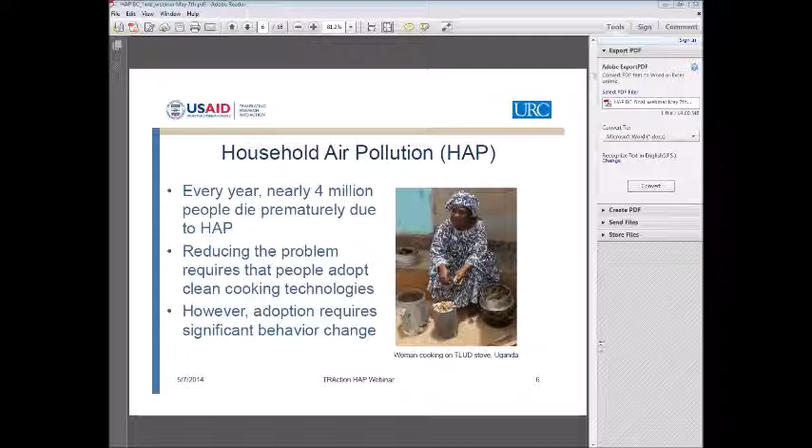TRAction supports research across many different countries through Latin America, Asia, and Africa, with a very large focus on Africa, as you can see from this list. Next slide. Our research focuses on many different topics in the areas of disease control, nutrition, environment, health service delivery, and access to care. And today we're going to be focusing on our household air pollution work. Next slide. Household air pollution is a serious threat to health, responsible for nearly 4 million premature deaths every year. Technologies are available that can significantly reduce the problem, but adoption and use of these technologies has been low, which is partly due to significant behavior changes that are required to adopt these technologies. Next slide, please.

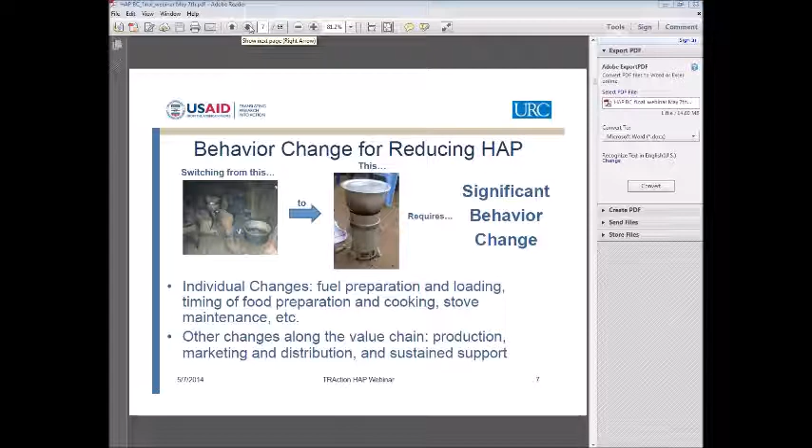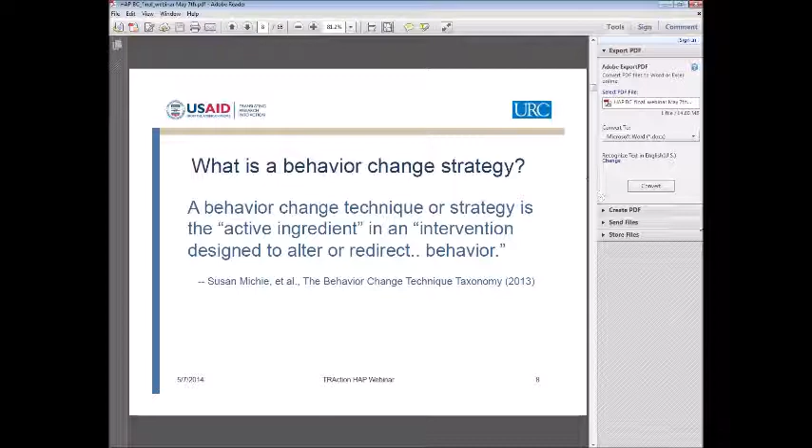Switching from an open fire to an improved cook stove requires that individual users change their cooking behaviors, such as the way they prepare and load their fuel, the time that they devote to preparing and cooking, and also cleaning and caring for their device. But beyond the individual, other activities along the value chain must also be changed to create an enabling environment for cook stove adoption. And this can range from setting up systems to produce and manufacture stoves, marketing and dissemination, and building infrastructure for repairing and replacing stoves. Next slide. To address these challenges, it's important that behavior change techniques are incorporated into any cook stove program. And for the purposes of our presentation today, we're defining behavior change techniques or strategies as the active ingredients in an intervention that are designed to alter or redirect behavior. Next slide, please.

In an effort to increase the evidence on behavior change techniques for household air pollution reduction, TRAction funded 3 research teams to develop and test behavior change strategies that can increase the adoption of improved cook stoves. So today we'll hear lessons from each of these 3 teams on which strategies worked and which didn't. We'll hear from PATH and Impact Carbon discussing lessons from their work in Uganda, and also from Duke discussing lessons from their work in India. Next slide. First, we'll hear from Alan Namagembe of PATH, then from Theresa Beltramo of Impact Carbon, and finally from Marc Jeuland of Duke University. And then to wrap up, Kirsty, a consultant working with TRAction on our household air pollution portfolio, will summarize the cross-cutting lessons across all 3 of the projects. Next slide.

So with that, I'll turn the floor over to Alan. Is Alan with us? So I think Alan has been having some difficulties joining the webinar. She's joining from Uganda. So we also have Nancy Muller on the line, who also worked on the PATH research, who will be able to present this portion. Hi, this is Nancy Muller. I'm presenting on behalf of Alan Namagembe, who, as Kendra said, has had a hard time connecting. But she will be with us in spirit and put a great amount of effort into this project. Next slide, please.

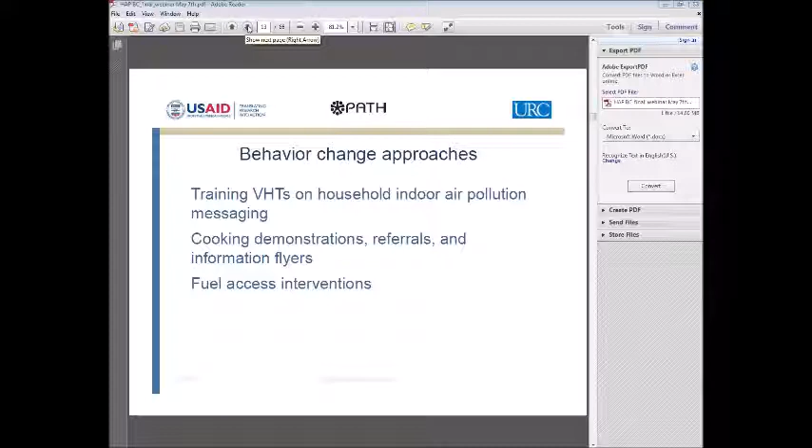These were strengthening the salespeople who were able to provide already processed wood for the TLUD stoves, and also providing bow saws to the community on a shared basis, and then they paid us back. Next slide, please.

So we wanted to just jump into what worked on a high level. What we saw was that the community cooking demonstrations were incredibly effective. They really allowed the community to get excited about this stove, which initially took some work because it would take a while to get it going. But once it got going, people were very, very interested and excited to see how quickly it cooked, how little smoke was produced, and the fact that it produced charcoal at the end. So they could experience these benefits firsthand, and that was a very effective behavior change approach.

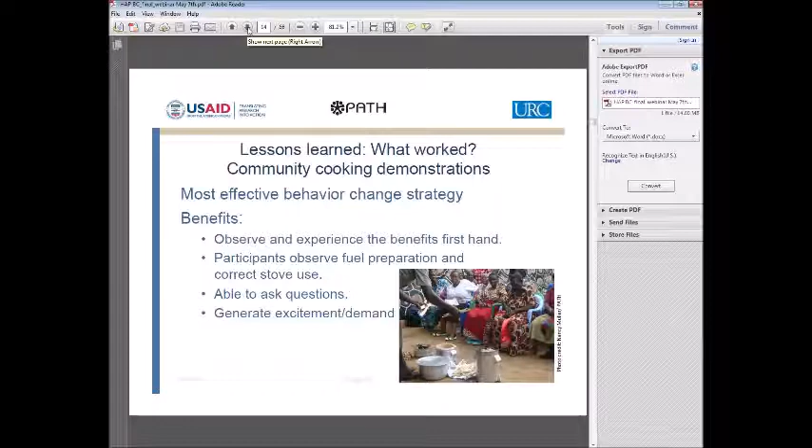They also were able to see the different steps of fuel preparation and loading and lighting, and they were able to ask questions of the community cooking demonstration representatives. Next slide, please.

What else worked? Increasing access to the processed fuel. That we realized was the critical element, that even though some people were willing to buy the stove at varying prices, the fact that fuel was so challenging to prepare made it really a disincentive to people to use the stove, even if they had bought it. So once we introduced these 2 fuel processing interventions, we found that there was a 42% relative increase in the use of the stove in the people that had access to these interventions.

Having the village health team members be information sources in the community was an effective approach. They were able to help raise awareness and engage the community in the importance of addressing indoor air pollution and the various benefits of improved cook stoves. And they could also provide information on where to get the stoves and correct practices. Next slide, please.

So the challenges, the things that really did not work well, were the cost of the stove and, as I mentioned, the fuel access. Overall, the TLUD was used for only a total of 7% of the recorded use events based on the SUMS monitoring. And the barriers to use were the cost, both in money and time, of using the stove, and really the lack of access to the processed firewood.

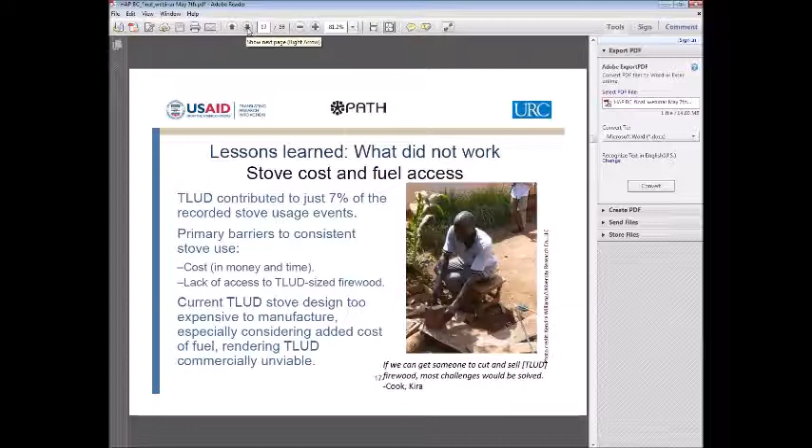The design, we found in doing a commercial viability assessment, was really too expensive to manufacture locally and sell the way that we were doing, especially when you look at this added cost of the fuel. And it really made the stove not commercially viable in the way that we were working with it. And we even looked at the potential for microfinance and found that that still would not have made the stove viable. Next slide, please. And the stove really was not fully compatible with the cooking practices of the communities we were working in.

There was stove stacking. Everybody had multiple stoves, and every stove was used for a different purpose. So the TLUD was effective at things like cooking quickly, but it was too expensive to just boil water quickly. So they had to think ahead about what they were going to cook on it. A highly motivated user definitely could use it. There were several households that used it more than once a day, but out of the total user population, it was not significant. And there was definitely mixed feedback on its ability to cook the staple foods that they eat in Uganda.

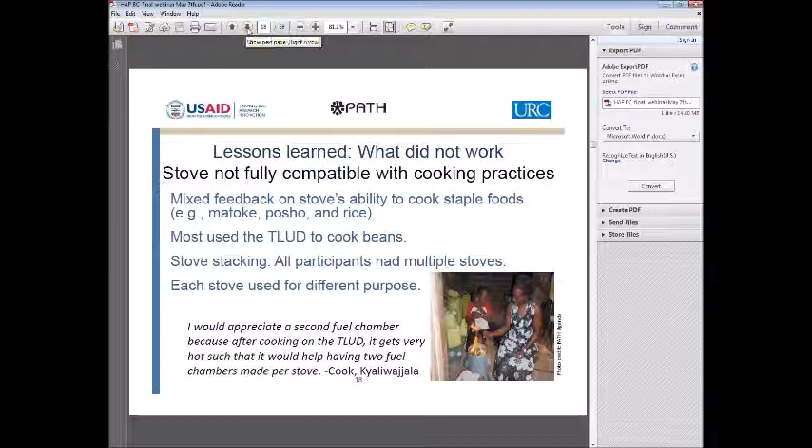So what we would recommend is integrating cooking demonstrations in the communities into any cook stove intervention as a way to engage the community and help them to understand the benefits and the use steps of these stoves. Also to consider absolutely the fuel when selling a cook stove and finding ways to pair the access of the fuel with the stove.

Training community health workers, I think we were surprised that that seemed to be an effective way of engaging the community, because they were really trusted voices in the community, they were present a lot and they were members of the community. We allowed many of them to buy a stove at a subsidized price initially, and that was definitely helpful because they could speak from experience. And then mapping out the true costs of manufacturing new and improved stove designs so that you can maximize the uptake.

Next slide, please. Next steps for us are that we are looking into innovative sales and marketing and distribution approaches for clean fuels like LPG. We're very concerned with the health effects of cook stoves, and we want to look at approaches that we feel could have the quickest route to affecting health, understanding that there will be many issues related to marketing and distribution and cost that need to be addressed. We're also looking at bundling improved cook stoves and fuels with other consumer goods and looking at ways of financing them. So the third approach would be to identify financing mechanisms that could make these products more affordable and more commercially viable.

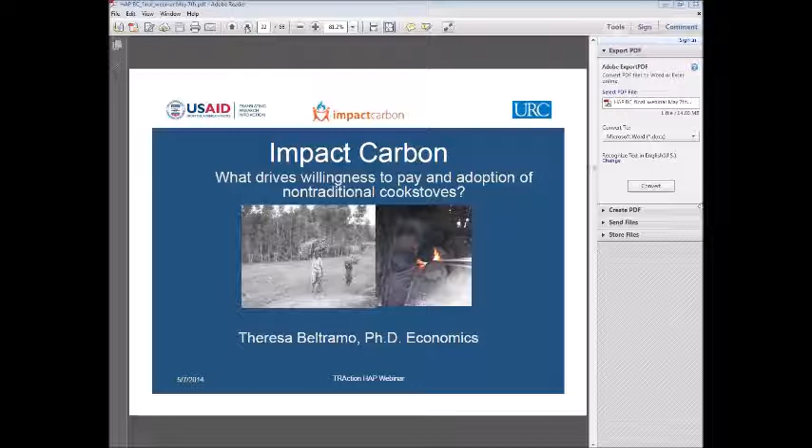So let me begin by saying that if we were to think about the biggest problems affecting our world today, any socially conscious person would have to include poverty, disease, and climate change. Traditional cook stoves cause all three of these simultaneously. Yet little hard evidence has been gathered about what actually motivates purchase of and willingness to pay for non-traditional cook stoves. Next.

Today I present results from our USAID TRAction funded research, which has been designed in collaboration with colleagues David Levine at Berkeley and Garrick Blalock at Cornell. The goal of this research is to test some solutions to hypothesized barriers to adoption of non-traditional cook stoves. In particular, today I will present on 2 of 4 randomized controlled trials funded by USAID. The first randomized controlled trial tests whether improved contracts can increase uptake of clean cook stoves. And the second tests what factors affect willingness to pay for clean cook stoves. Particularly, we test whether marketing messages that the cook stove saves time and money, and that the stove improves health, increase willingness to pay for non-traditional cook stoves. And this research takes place in rural western Uganda. Next.

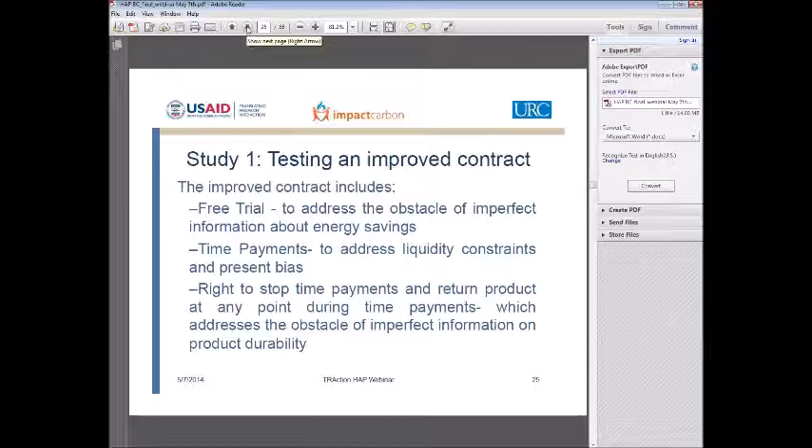So our study is designed as follows. We randomly selected 10 subsets of villages, which are called parishes in Uganda, so the groupings of villages, if you will, to receive what we call a pay within the week sales offer, and 14 parishes to receive the improved contract I just described to you.

For the pay within the week offer, we had an initial sales meeting, and we gave households a week to go home and gather funds before we had our second sales meeting. Our sample size is on average about 60 people per parish meeting, and we had 412 households attend our sales meeting in our pay within the week offer and 720 in our improved contract offer.

Then for both sales offers, we held marketing meetings to sell the stoves in each community. Our price was US $16, and we set this price based on our previous willingness to pay experiment, which I'll describe next. And at the sales meeting, people placed orders to purchase stoves. Next.

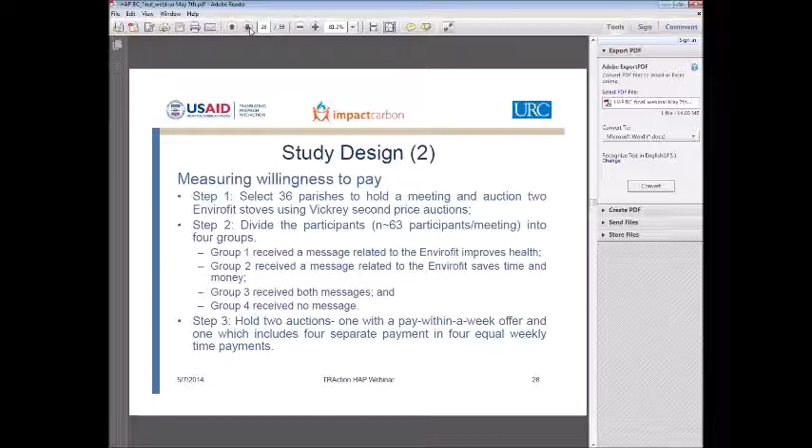Next. What do we find? We find that marketing messages do not affect willingness to pay. There's no effect for marketing messages on willingness to pay, whether it's health, or the stove saves time and money. Time payments, though, do raise willingness to pay for a non-traditional cook stove by 41%. Not surprisingly, wealth matters. Each additional asset owned increased willingness to pay by 10%.

And when we test for the role of a stable income, we find that having a stable income increases willingness to pay by 8 to 10% for both men and women participants. But there's no effect of having a stable income on willingness to pay for married women. We find large gender differences. On average, men are willing to pay 21 to 23% more than women for the cook stove. Next.

The success of the improved contract suggests liquidity constraints, present bias, concerns about savings and durability are all important barriers to address in cook stove programs. Over 90% of our participants who accepted a free trial successfully completed time payments in both studies. So we feel that this research shows that you can roll out improved contracts, and they do work. Some strategies to help keep costs of payment collection low include employing focal point people, as we did, to collect the funds, and or, where appropriate, using mobile payments. Next.

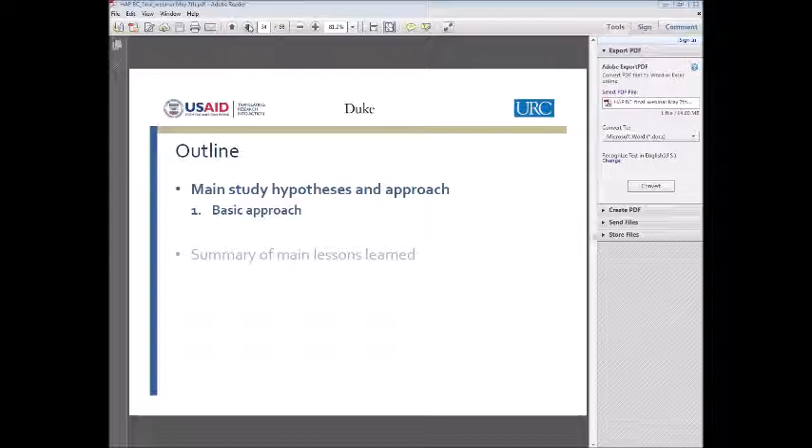So I'll begin with discussing the main study hypotheses and features, and then talk about the main lessons learned from the research. Next. Our basic approach was very much motivated by this problem of not knowing much about what can be done to stimulate adoption of improved stoves. Next slide. So we took a pretty deliberate approach as we were designing our experimental study. And this began with a literature review looking at prior evidence, both from the literature on improved cook stoves, but more generally on other environmental health improving technologies.

Next. And then we went to the field and collected detailed baseline data on about 2,000 households in 2 different locations in India, which I'll talk about in a minute, to better understand baseline cooking practices, knowledge and perceptions of improved stoves as well as traditional stoves, and learning about stove design preferences through some stated preference discrete choice experiments. Next. Using this baseline data, we developed a series of pilots where we tested different potential intervention features. And these intervention features came out of the lessons of these pilots.

So the pilot experiments taught us a number of important things. First, that knowledge of improved cook stoves, at least in terms of their benefits, was quite limited. The second big lesson from these pilots was that stove choice appears to matter and that not all households favor the same technology. The third thing that we learned was that many of these rural and poor households are heavily liquidity constrained, and so paying for stoves in one single upfront payment was something that very few households would consider seriously. And then finally, building on the liquidity constraint point, we also found that demand for improved cook stoves was fairly limited.

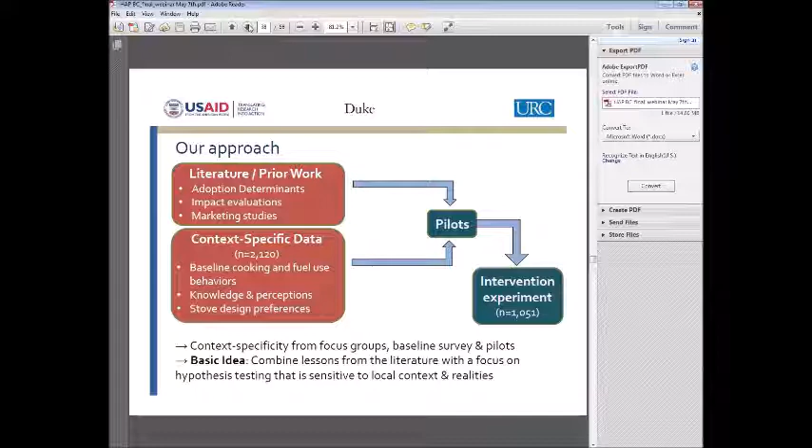Next. So with these lessons, we developed an intervention experiment to test for the effectiveness of specific features of the stove promotion program. Next slide.

And just to tell you a bit more about the context of our surveys, we collected the baseline data in the Gangetic Plains of Uttar Pradesh, highly densely populated zone, kind of a hotspot for traditional biomass burning in traditional stoves.

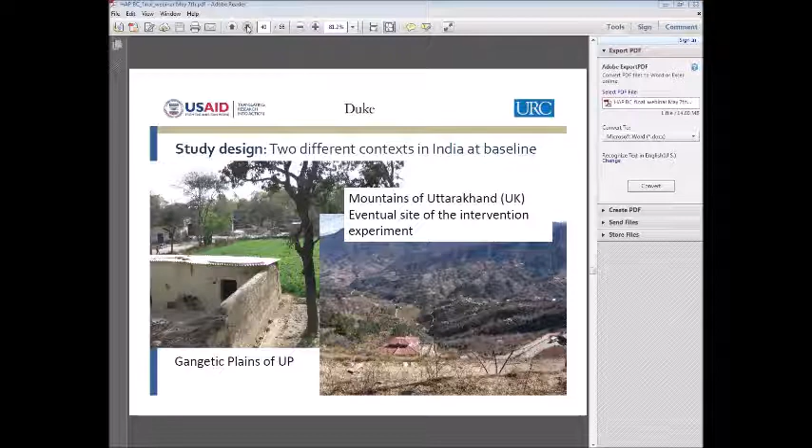Next. And we also collected baseline data in a very different context in the mountains of Uttarakhand, where there is also fairly high population pressure, but not nearly to the same extent. More fuel wood available to households, but also accessibility challenges.

Next slide. And within these two states, we deliberately stratified our sample into observationally similar communities. So each of these had two sets of communities, one of which was a set of communities where our partner NGOs had prior experience working and promoting various technologies, though not necessarily cook stoves,

and the other set of communities where they had not previously interacted, with the idea in mind that this institutional history and perhaps the relationship between institutions and households would make a difference in terms of the eventual success of a stove promotion program. Next.

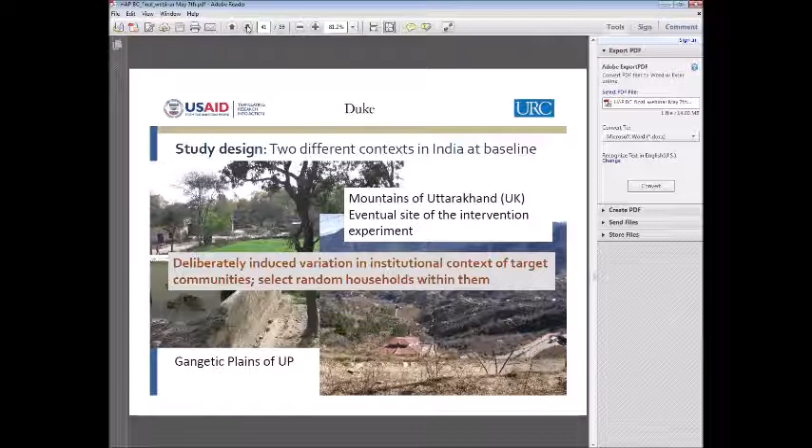Okay, so our main experimental hypotheses coming out of the pilots were that, one, intensive information and marketing would matter, and that this would only matter really if we designed a financing deal that would make sense for households, meaning that we could address their liquidity constraint. And then the second, in order to deal with potentially low demand for the stoves, that incentives, price incentives and subsidies would matter. Next slide.

So the features of our intervention experiment were first to provide information to all households on two different potentially improved stoves. One, a natural draft biomass burning stove, and the second, a very different technology, an electric coil stove that could be plugged into an electrical outlet.

And these information sheets compared the stoves in terms of a variety of different attributes, their costs, the fuel requirement, things like the maintenance that would be required, the amount of smoke emitted by the stoves, etc. So you can see a picture of the information sheet on the left side.

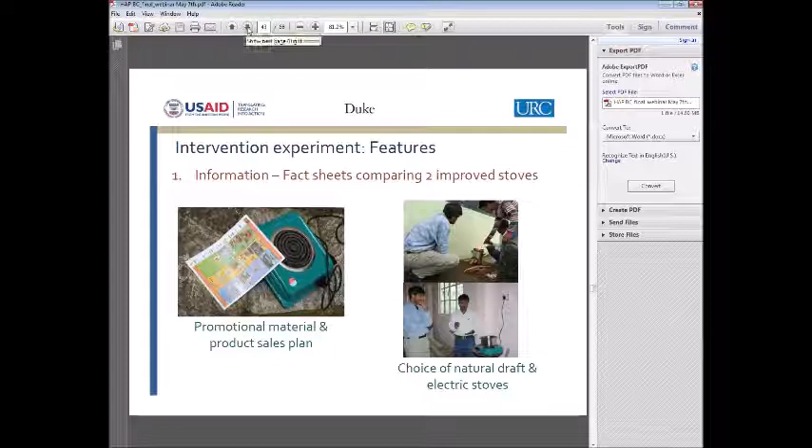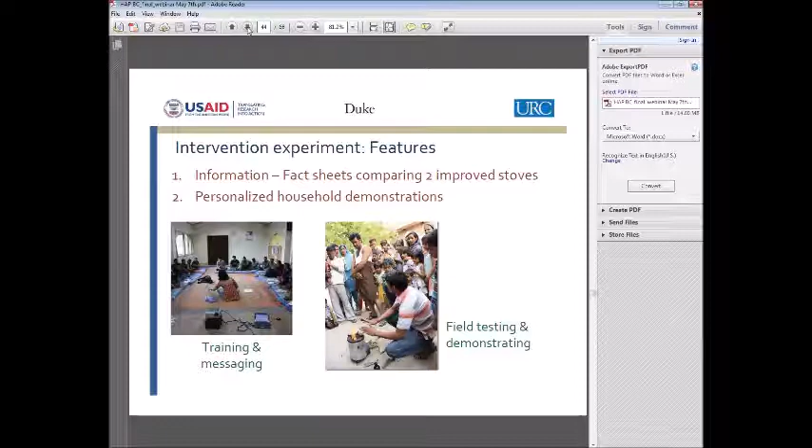Next. The second component of the intervention was to provide personalized household demonstrations of the stoves. So every household in our sample, and these households were randomly selected from the communities that we were working in, received a household demonstration from a trained team of salespeople. Next slide. Next slide.

And then the third feature was to allow households to make their payments in 3 even installments. This was to address the liquidity constraint that households might not be able to pay up front. The fourth feature being that we randomized these incentives to households, and the incentives were structured to be rebates that would be delivered to households at the time of the final installment payment.

So it was a delayed subsidy, with the motivation being that this might encourage the households to experiment with the stoves, because the rebate was conditional on them using the stove, as observed by our sales teams.

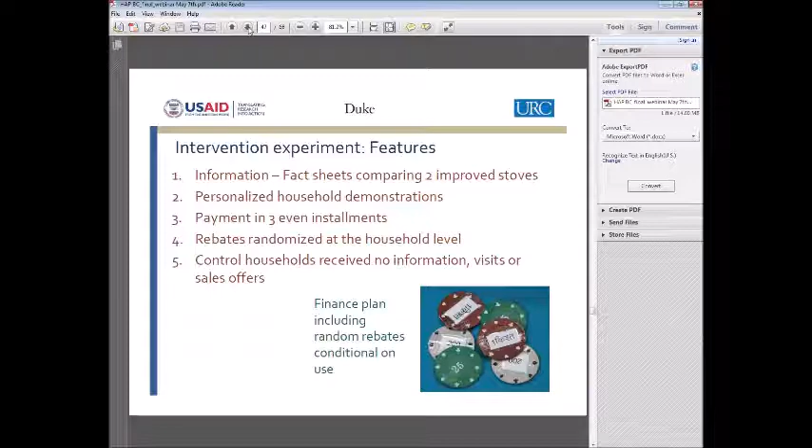Next. The control households, who were the comparison group, received no information, no sales visits, and no sales offer. So we can think of this as 2 large groups of households, control and treatment households. And within the treatment households, they had different levels of rebates that were randomized. Next slide. Okay, so to tell you about the main lessons from our study.

Next. The first major lesson is that it does appear possible to achieve high adoption in low-income settings. In our Uttarakhand sample, which is where we carried out the intervention, 57% of households were below the poverty line. In our treatment group, we see that ownership of improved stoves doubles from 30 to 60%.

You may be surprised at those high baseline levels of improved stove ownership, but these are primarily LPG stoves, which have penetrated to some extent in rural India. In the control group, we see no increase in improved stove ownership over the time of the study.

And essentially, this is evidence that with a full court press of information and promotion, and I'll show you results on the incentives, it is possible to achieve high adoption of improved cook stoves. Next slide.

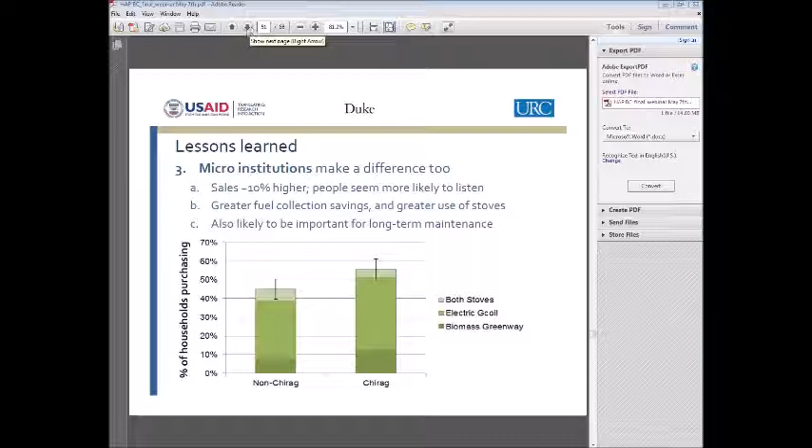It's very important, I think, when we think about designing these improved stove interventions to consider the role of technology choice and what households actually want. We observed great variation across households in our sample in terms of the various features that they placed the most weight on. In our pilot intervention experiences, we discovered that there was great enthusiasm for this completely different technology that we hadn't originally considered for our study, which was this electric stove.

And then finally in the experiment, we see that there was great enthusiasm again for that stove. Roughly 3/4 of the purchases are for the electric stove, and the other quarter of households select the other alternative, which is the natural draft stove. And it's important to note that these two stoves were roughly the same price. Next slide.

Finally, based on the experience from our pilots, we were able to design an intervention that achieved high adoption. But without really carefully testing these different features, and this involved products, as well as the demos and the sales pitches, and payment mechanisms, it's likely that we would have designed something that would not have been nearly as effective. So doing some small-scale experimentation prior to scaling up an adoption program is pretty critical. Next slide.

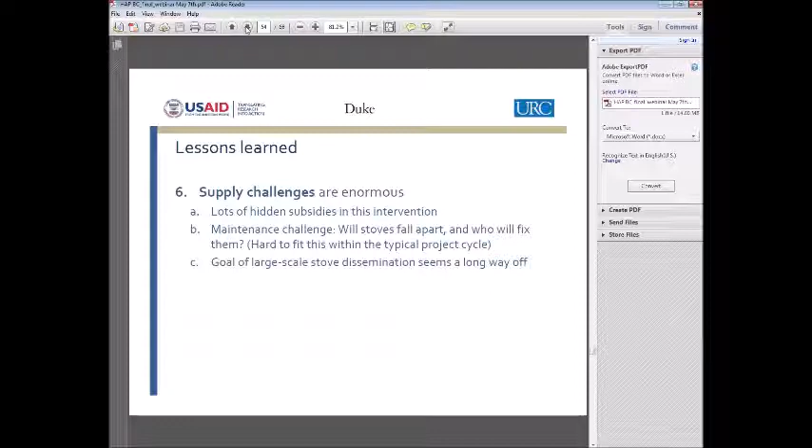Within our short-term study, we couldn't really investigate this question in great detail. But suffice to say that the goal of large-scale stove dissemination seems a long way off because of these supply challenges. And we think that the latent demand is there for many of these technologies, but getting the stoves to these sites is expensive and likely to drive up costs. Next slide. So here is a recap of our main lessons.

And just to tell you a little bit about next steps in our thinking in terms of this study, we remain in close contact with our stove promotion NGO partner in Uttarakhand, and we plan to study longer-term impacts in these communities since we only measured short-term impacts in our follow-up survey. And part of that will also be trying to calculate better the costs and benefits of these interventions and what are some of these hidden supply costs that we don't know too much about.

And then finally, perhaps doing some experimentation around maintenance and provision of maintenance to households that adopt these stoves in rural and remote locations. Thank you very much.

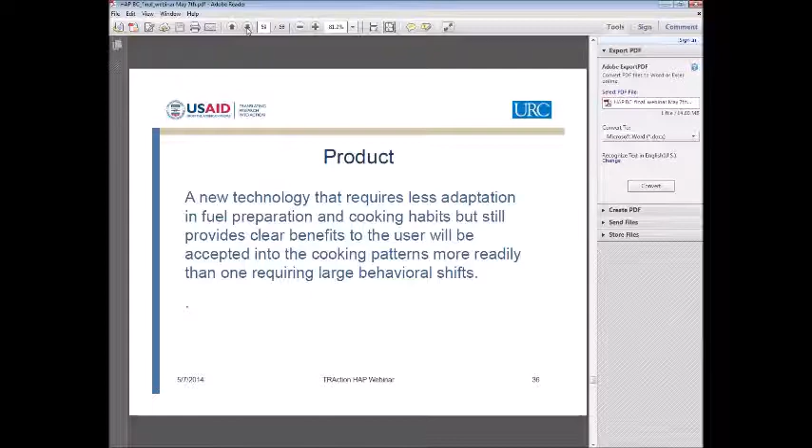2 of the projects showed that consideration needs to be given to the current and long-term mechanisms and channels for supply for the stoves, and if necessary, the required fuel at the beginning of the project. Mark just presented how the supply of the stoves was a great challenge and a potential barrier to scaling up the stove project. And Nancy also described how the use of the TLUD actually increased when processed fuel was made available. These results demonstrate key prerequisites to enable the targeted behavioral change. Next slide.

The projects also presented 2 effective mechanisms to stimulate demand for the new technologies in their target markets. They were to increase trust in the product and the people promoting and selling it, and once this has been achieved, to then effectively promote the product. Next slide.

So a low level of trust in the product and the promoters can inhibit demand. This, we find, is a particular challenge in situations where people from outside the community are promoting a relatively expensive, unproven new technology. The studies highlighted several mechanisms that worked to gain the community's trust and ultimately had a positive impact on stove uptake. The free trial model presented by Teresa reduces commitment to buy until the product has been tried and concerns such as those regarding durability and ability to function have been addressed.

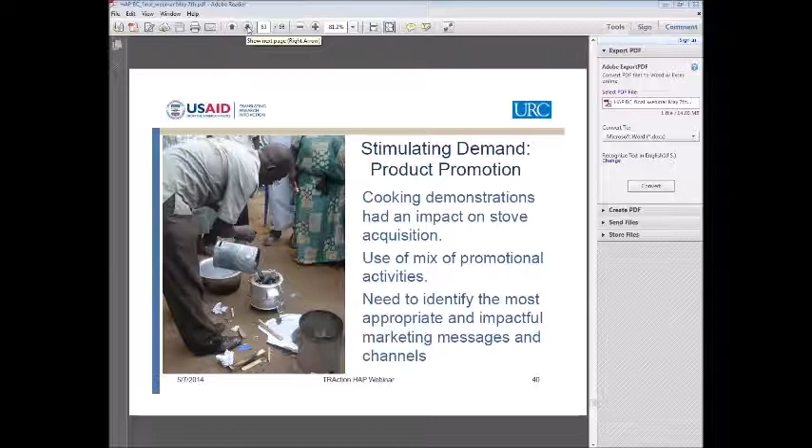Okay. The end user needs to have purchasing capability of the product offered. Without this, the program is not sustainable. We have seen that removing the barriers caused by liquidity constraints can have an impact on stove uptake. Both the Duke and the Impact Carbon studies showed that offering financial solutions had a positive impact on the uptake of the stove. However, finding the right financing mechanism for the community also requires consideration, and like all the other interventions we've discussed today, they need field testing and trialing for local acceptability. Next slide.

I think the ultimate aim of all the behavioral change interventions that we present today is to achieve correct and consistent and hopefully exclusive use of a clean and efficient stove. PATH showed that the cooking demonstrations and well-trained respected VHTs can promote and support correct stove use, even when it requires very different techniques to the traditional methods. There is an argument that if the cook uses the stove correctly, he or she will be more likely to see the potential benefits of the stove, and so will be encouraged to continue using it.

However, we saw that although perhaps correct, the overall use of the TLUD stove was very limited, primarily due to poor access to suitable fuel and limitations when cooking popular local foods. These reasons for the low adoption need to be considered and obviously addressed before planning future stove programs. Data will be made available on the use of the stoves from the Duke and the Impact Carbon studies in the future, and we hope to present more patterns and determinants of stove use at that point. Next slide.

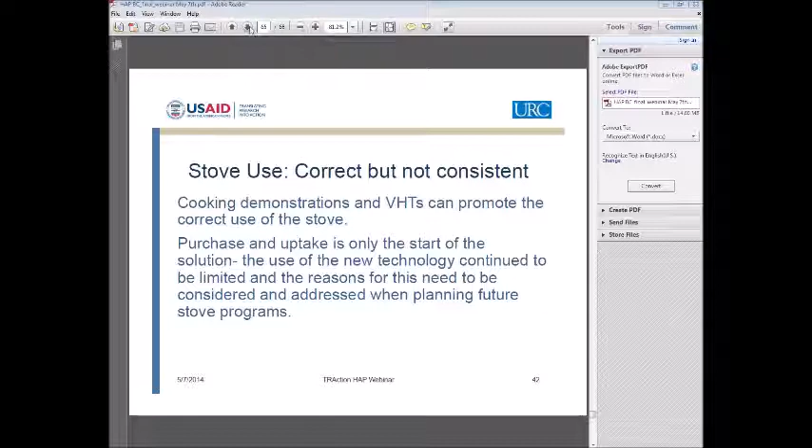So today we've presented a brief overview of the high-level results from these 3 studies. These results provide valuable contributions to the discussion on what factors need to be in place for behavioral change to occur, as well as what behavioral change strategies are effective to stimulate the adoption of clean technologies. Further study and discussion is clearly required to explore which behavioral change strategies are most effective for enabling the adoption and consistent use of clean cooking solutions. And that's across the value chains from policymakers, producers, cooks, as well as the fuel sellers.

The project results will be presented in more detail alongside several other articles in the Journal of Health Communication Special Issue on behavioral change in the clean cooking sector. Due to be published in January 2015, this issue aims to promote the practice of appropriately and effectively implementing behavior change strategies and techniques. So we're going to ask you to look out for that one. Next slide, please. Thank you.